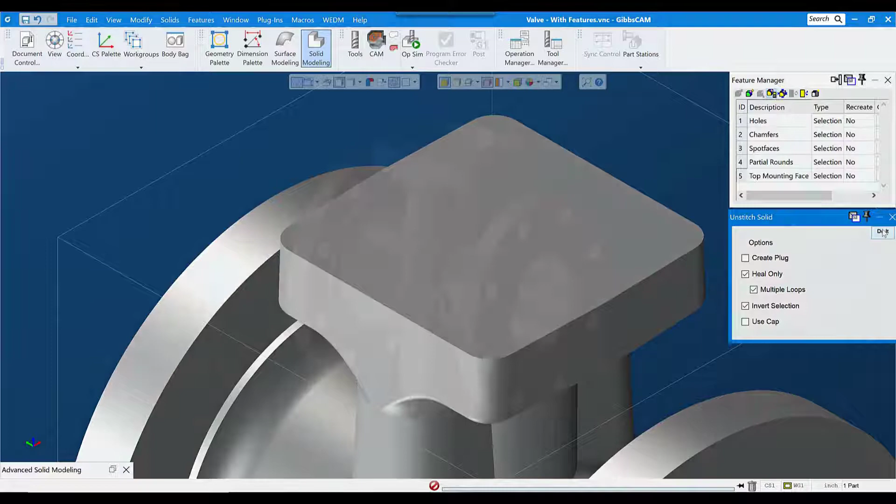out of the model. This valve body is a fairly straightforward part to program, but we'd probably want a casting model, both for accurate material only calculations and to make the simulation more realistic. So I will start by placing the model in the body bag by double clicking it. While it's still selected in the body bag, I'll go to the Modify menu and select Duplicate.

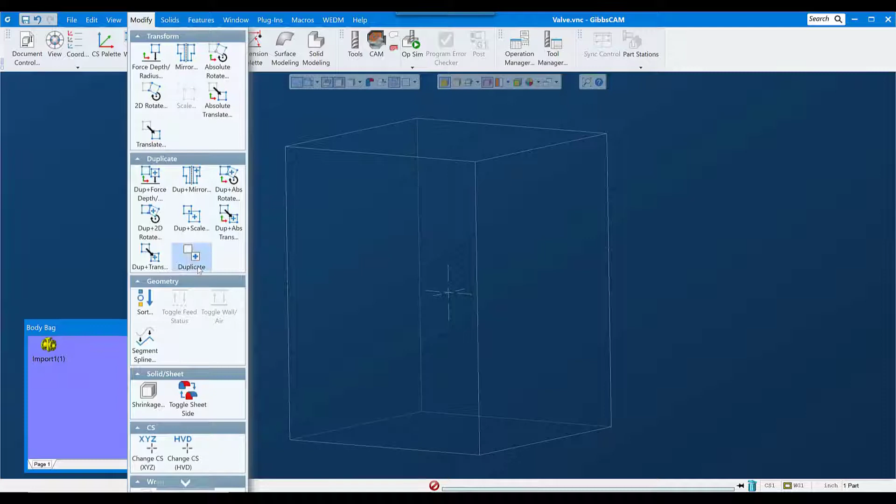The shortcut key for duplicate is Control D, and that gives me a copy of whatever was selected when I duplicated. I'll leave the original model in the body bag and leave it alone, don't want to change it, and I'll modify the copy. Now under Solid Modeling and Advanced Modeling, the fourth button over is Unstitch Solid.

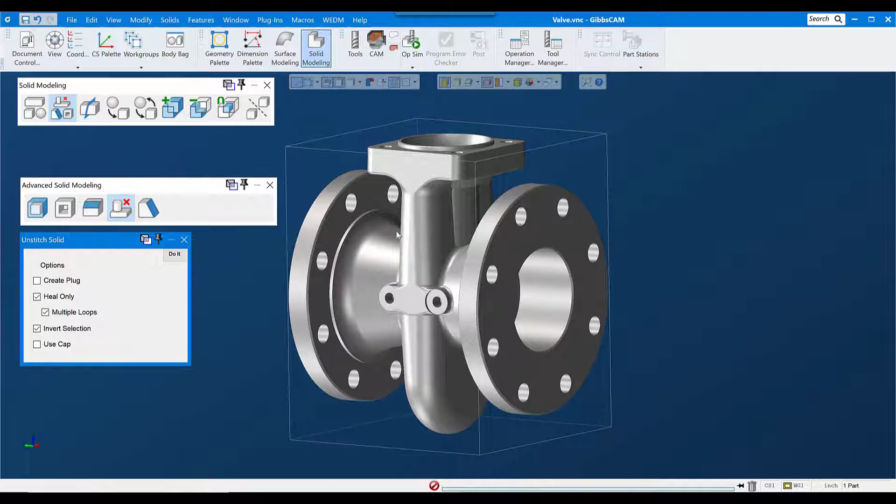Unstitch Solid allows me to remove features from a model. And there's two modes I can use, especially for holes. The first is Edge Selection. If I turn edges on, I can select the top and bottom edge, or really any edges in a single void that break out of the model, that break out into open air, and click Do It.

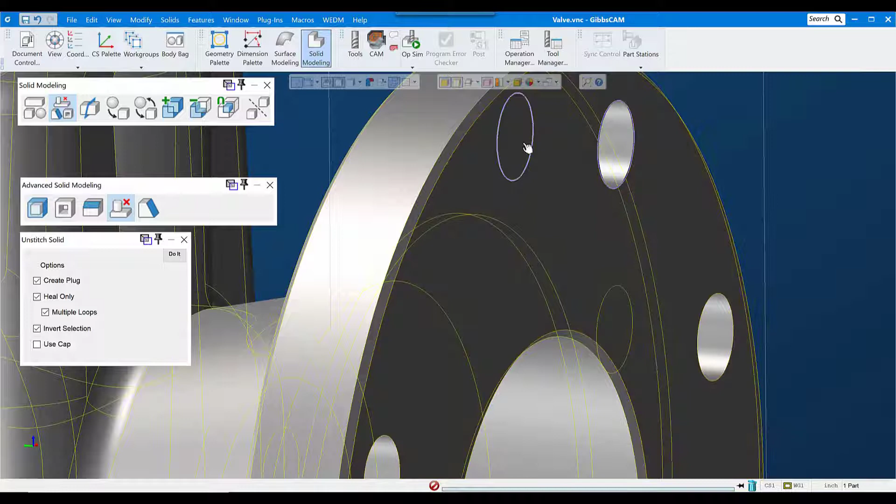Now notice that there is a Create Plug choice here. If I turn that on, there will be a negative of the space that's filled in created, as well as removing that space from the model. So here's a plug that represents the negative of that hole. Typically you would use this for core and cavity or some other situation where you need the negative of that void. Generally speaking, I'm going to leave that off for work like this.

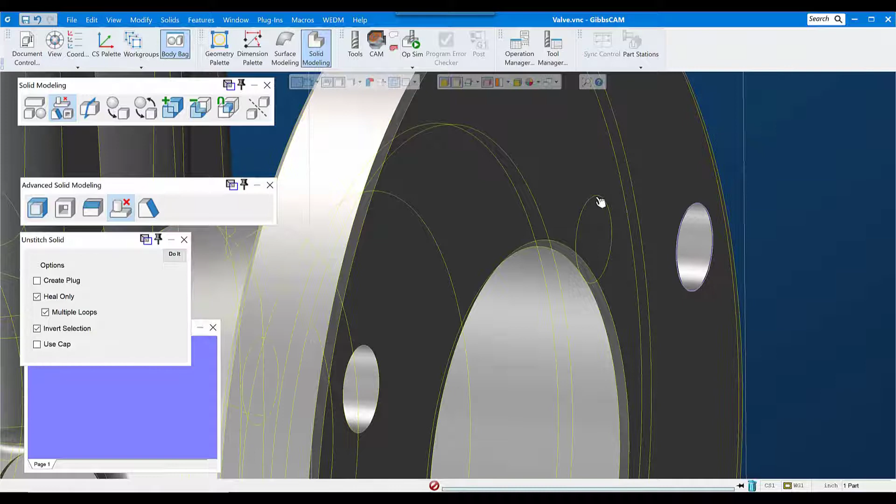The limitation to selecting edges for unstitching is that I can only do one void at a time. If I try to do multiple voids, I get a message saying edges split body into more than two face sets. So I'm limited to one edge set at a time.

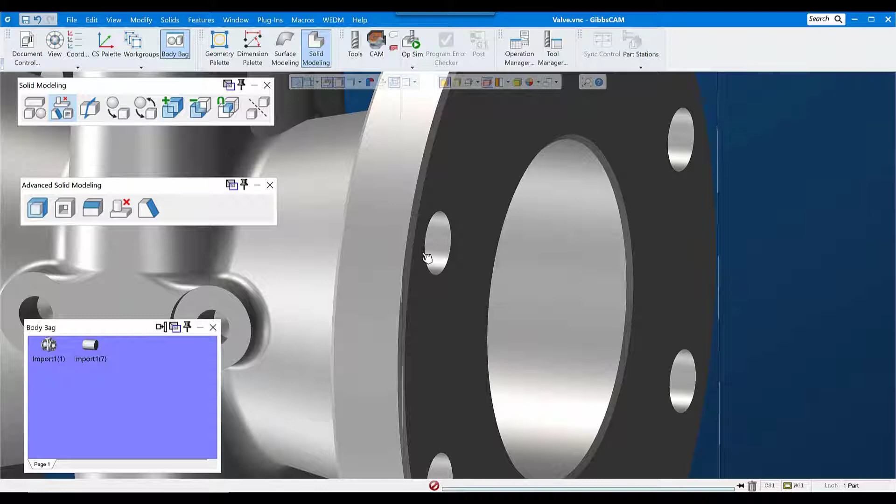Now the other mode that I can use is face selection. Face selection allows me to simply select all the faces that make up that hole, and on simple holes like these, this is probably the fastest, easiest way to do it. I get the same result as with edge selection, with the exception that I can select multiple holes or multiple voids at one time.

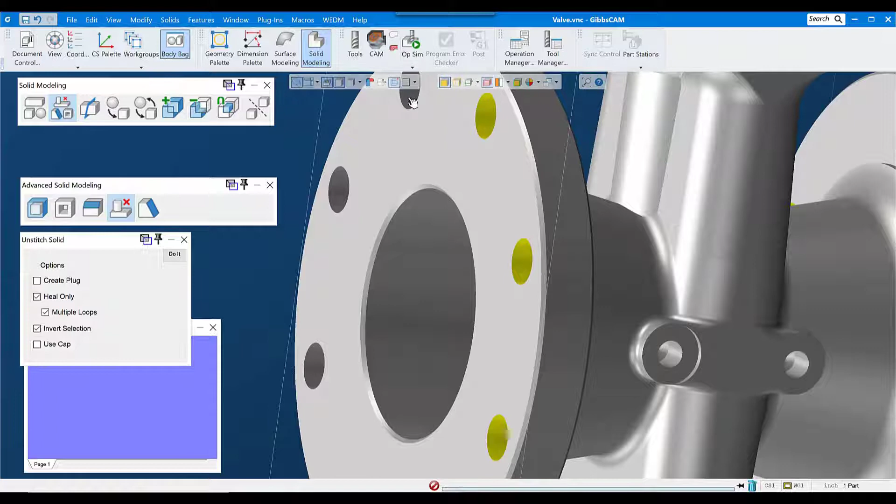But you need to remember that I have to select all of the faces that are part of that hole. So on simple holes like this, it's fairly easy and straightforward, but on more complex holes, it can be time consuming or difficult to get all those faces selected. We'll go ahead and remove these holes up here while we're at it.

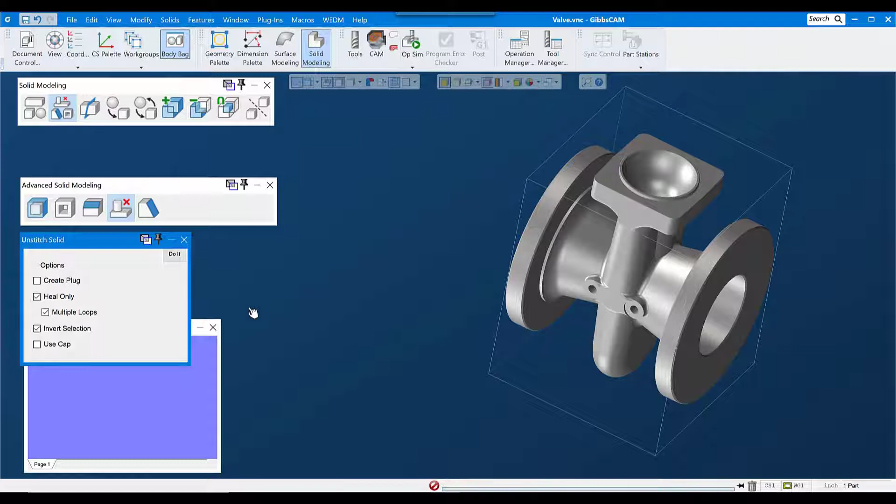Another use that I can put Unstitch Solid to is removing other features such as chamfers and fillets. As long as the software can merge the faces on either side of what you're unstitching, it will successfully unstitch.

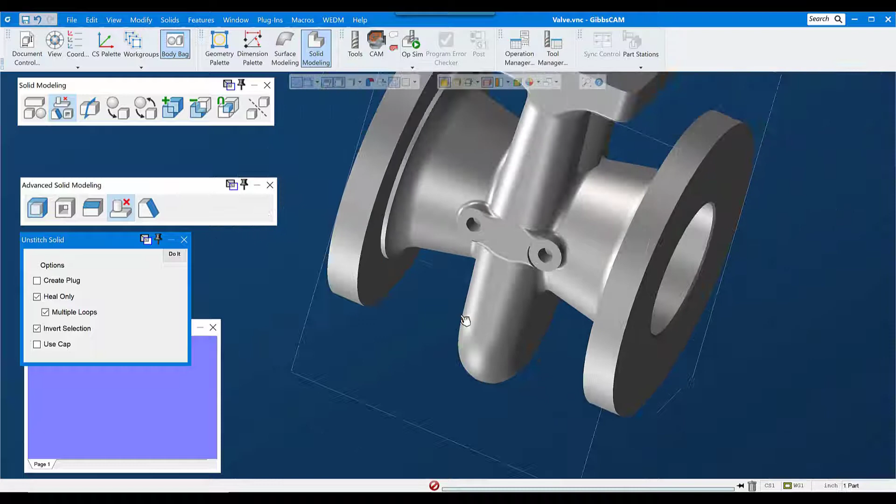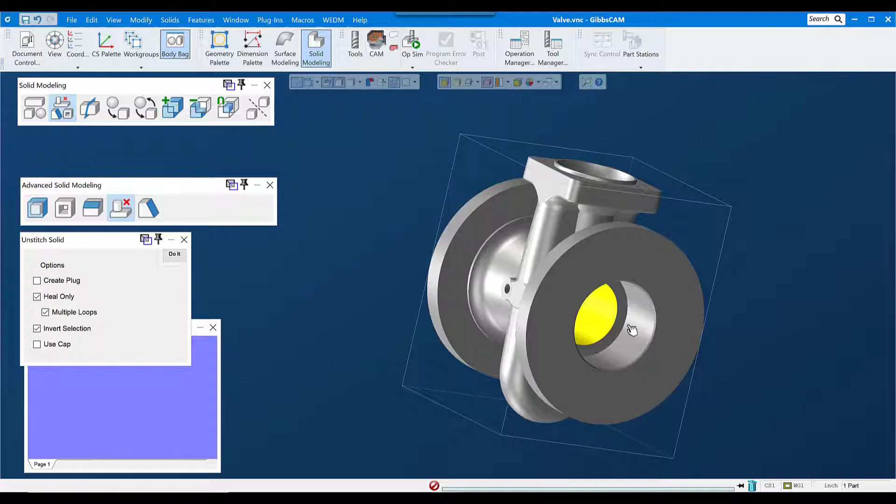Now, to remove this big cavity here, it's pretty easy to see that we have three places where that breaks out into open air, but in reality we have 5 because these holes also intersect that same void. So it would be a bit tedious and possibly difficult to reach all the faces that we need to reach to do face selection. So for this, I'm going to go back to edge selection and select the edges where this breaks out into open air.

So we'll get the 3 big ones, as well as these 2 smaller ones. And we'll unstitch that. Now in a situation like this, sometimes it's handy to turn on Create Plug,

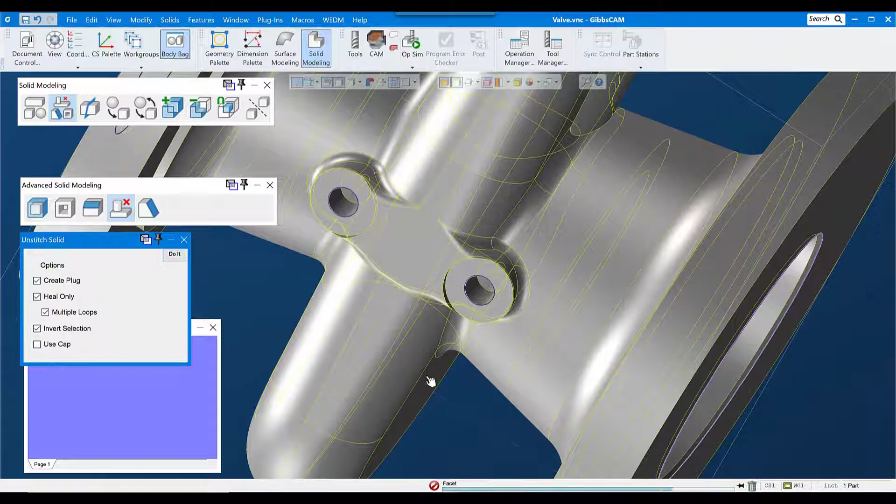which can give us a negative of the space that was filled in, which sometimes is handy for making sure you understand exactly what's going on inside the part. In this case, it's really not necessary. I'll go ahead and delete it and bring our model back out.

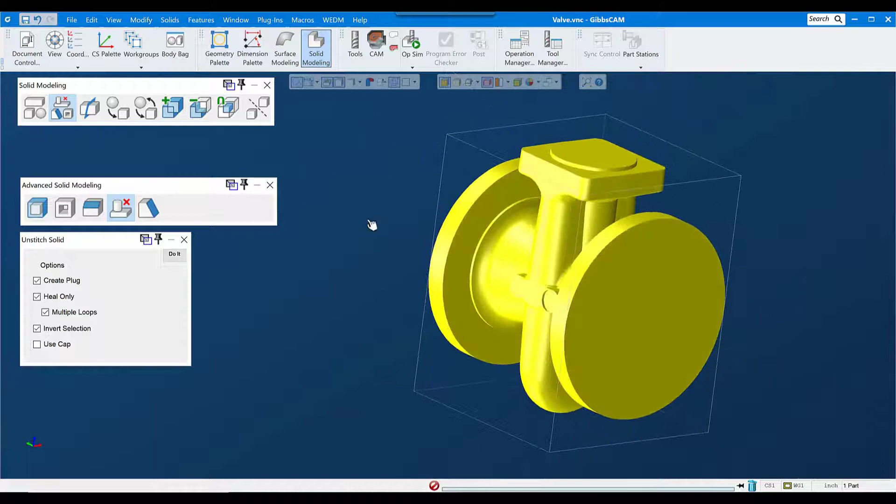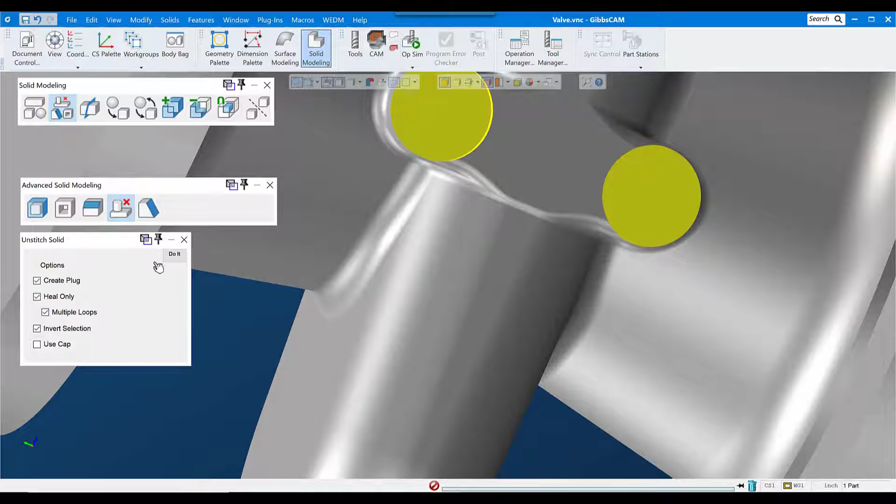Now, just one more thing, you're not limited to chamfers, fillets, and radiuses. You can also unstitch bosses and counterbores, spot faces; as long as the software can merge this face to the surrounding faces, it can successfully unstitch.

Right, I'm going to put this in the body bag, and I'm going to duplicate this part one more time. And I'll show you, I guess you could call it a trick, for selecting a lot of holes at one time. This is handy if you have a part that's got a lot of holes in it or more complex voids that need to be filled.

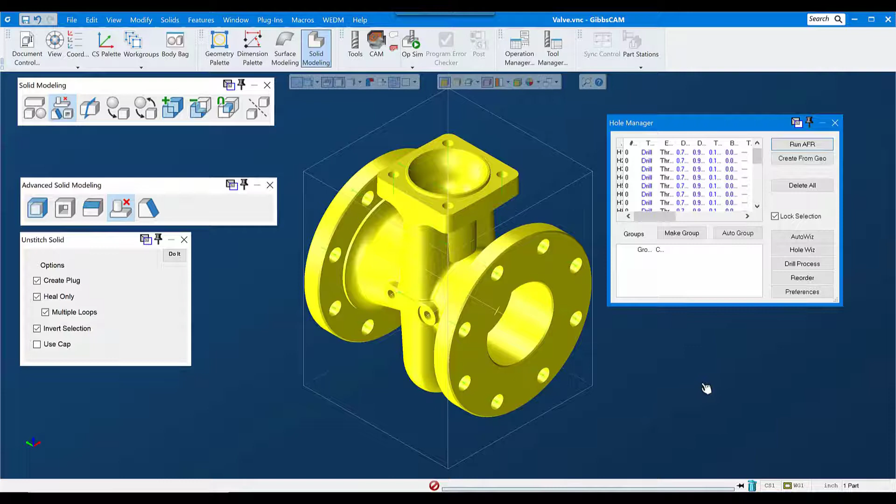And that is under features, using the hole manager and running automatic feature recognition to find all of the round voids in this part, which it has done, and I typically would auto group them, and I can go through and select a group at a time and unstitch those.

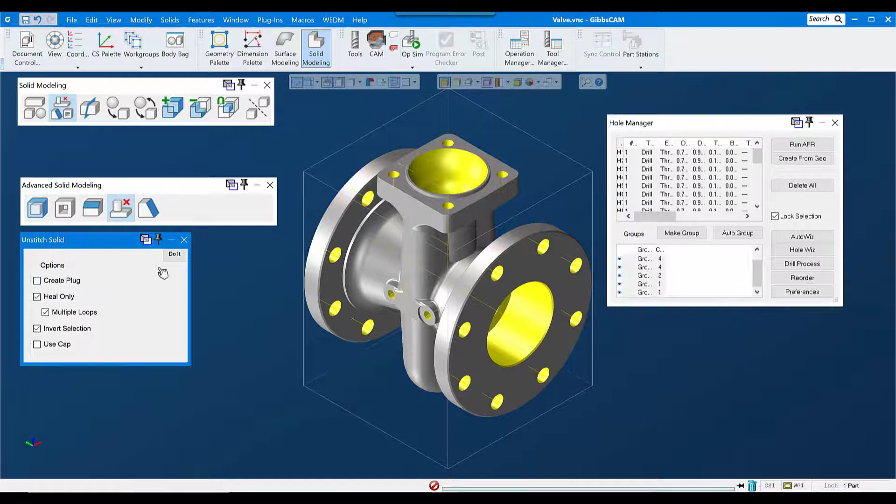Or if I know that I want to just remove all the voids from this, I can select the top through the last group, so select all of these groups, and while they are selected, I can just unstitch them all. I don't want to create a plug here. So that's a way to quickly select a large number of holes or voids at one time.

In this tech tip video, we examined using the Unstitch Solid command to defeature a model. We might want to do this to create a stock body representing a casting or forging, such as what we were starting with here, or representing a part with some of the features already machined in prior setups, or possibly to create a process model to make it easier to achieve the toolpath that we're looking for.

For instance, a 3D face that's got some small holes in it that we want to remove just so we get a continuous toolpath without the software paying any attention at all to the holes.